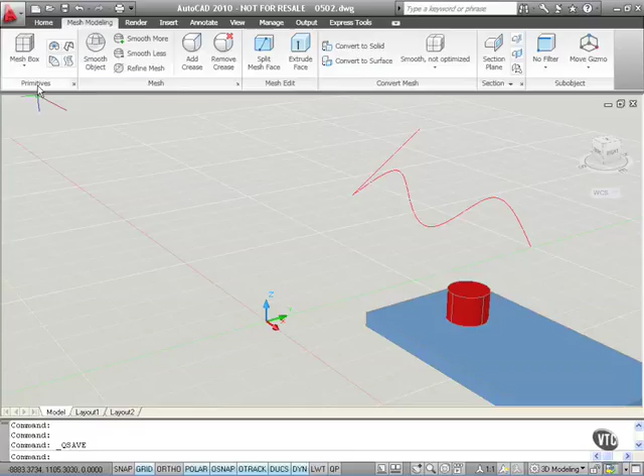What I'm going to do is create a mesh box, what they call a primitive, in the Primitives panel here. I click on Mesh Box and come into the drawing area. It asks me to specify the first corner of the box in the XY plane, so I click just here. There's the lower face of my box, and I'm going to make that 1500 wide, like so, and press enter. Then it asks me for a height going upwards, and I'm going to go for a height of 300.

Now that is a primitive at the moment. A primitive is different to a solid. A primitive allows you to work with it and freeform design it. So what I want to do here is convert this to a solid. It's a box, so it will have to become a solid, not a surface.

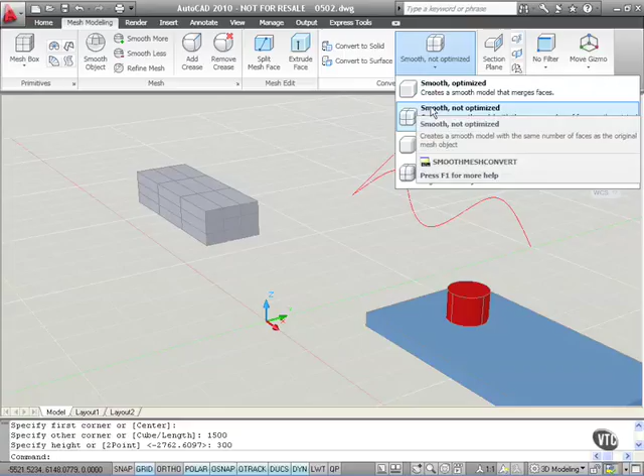On the Convert Mesh panel here, I can select how I want my solid to be. It can be a smooth optimized solid with a smooth model that merges faces, or smooth not optimized, which will keep the original faces as the mesh object, the primitive object, or I can have faceted corners, like beveled edges. I'm going to go for smooth, not optimized, like so. So that setting is now set.

I go to Convert to Solid, and I select my mesh primitive, like so. I press Enter to confirm. The 3D modeling kicks in, and as you can see now, it's a 3D solid. So that's converted it from a mesh to a 3D solid.

Now let's just have a look at our original cylinder here and our rectangular object here. Can I convert those to a smooth, not optimized solid? Well, let's check that out. Convert to solid, I'll stay with smooth, not optimized here. Convert to solid. If I select the cylinder there and press enter, read the command line: object cannot be converted. That's because it's already a 3D solid.

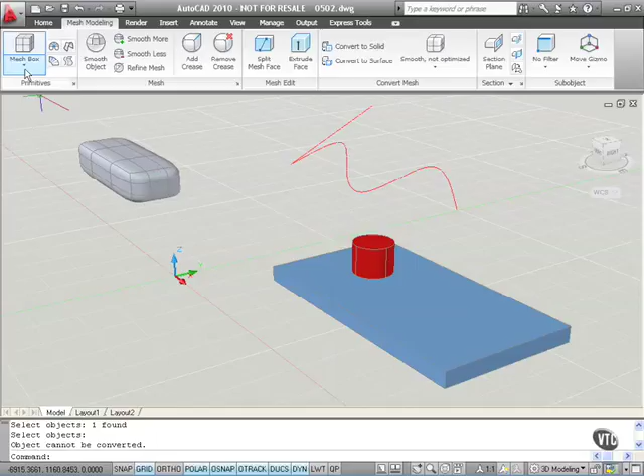So what I would have had to have done there is create primitives here. I can do things like a mesh cylinder and a mesh box, and then I could have worked with those and converted them to solids. Notice as well, in here I can create revolved surfaces, ruled surfaces, meshes and tabulated surfaces, and also edge surfaces. So I can create lots of different primitives that can be converted to solids.

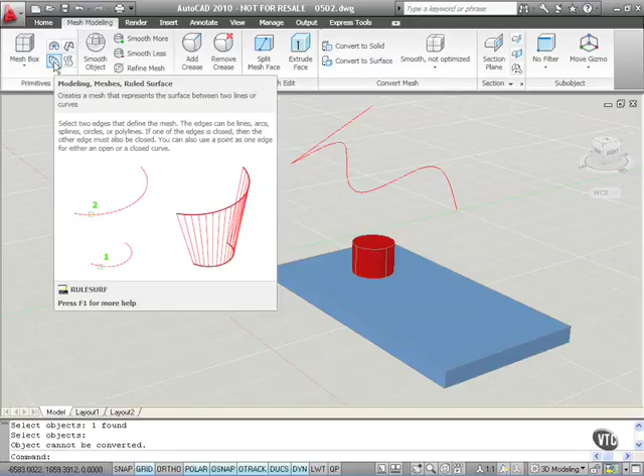Now what I am going to look at is how do I convert to a surface, for example. I've got convert to surface here. What I'm going to do is go up here, and you can see I've got a ruled surface, which creates a mesh that represents the surface between two lines or curves. Or I've got this one here, a tabulated surface, that creates a mesh from a line or a curve that is swept along a straight path. For example, you can see there corrugated roofing.

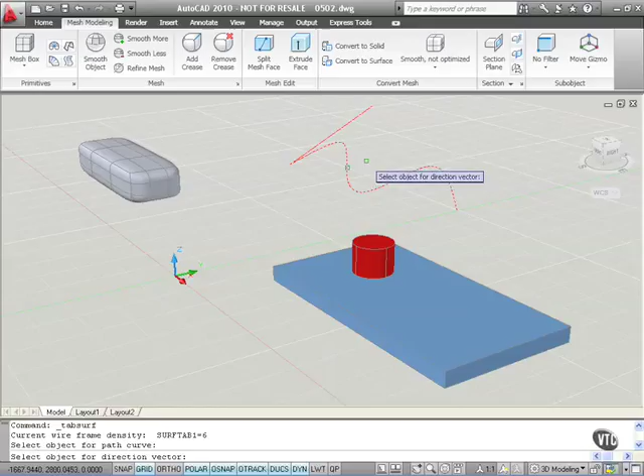Let's go with that one. What I've got to do here is select my object for the curve. That can be a spline, like this spline here. So I select the spline, and now I select the object for the direction vector, that's my line there, so I click there. There's my surface. Now it's come out towards me in the direction over my other objects.

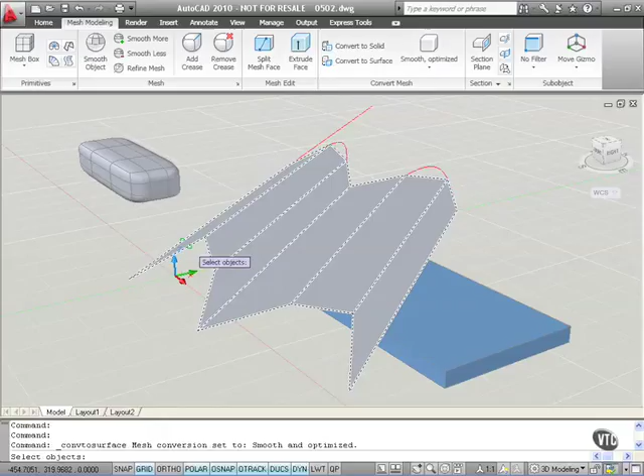That's not a major problem. What I'm going to do now is I want a smooth, optimized surface, so that's going to merge all those faces that you can see at the moment on that mesh. So I click Convert to Surface, and I now pick my mesh object here, like so, and I press enter, and that converts it to a curved surface, as you can see.

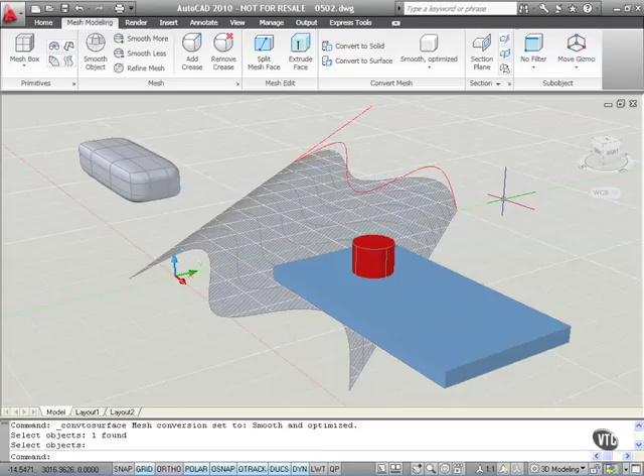So that's how you would create, for example, one of these rather splendid looking architectural buildings with amazing curved roofs. I've shown you a very basic example of that there, but you can see how easy it is now to create a curved roof on a building, for example. That's where all these new conceptual and freeform design tools in AutoCAD 2010 can again make you effective, productive, and more importantly, more profitable.